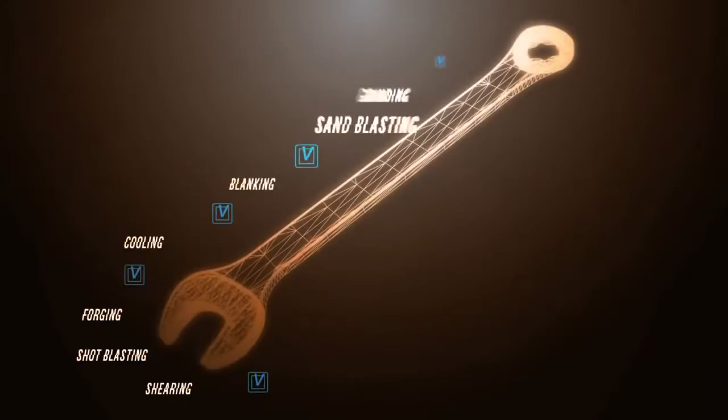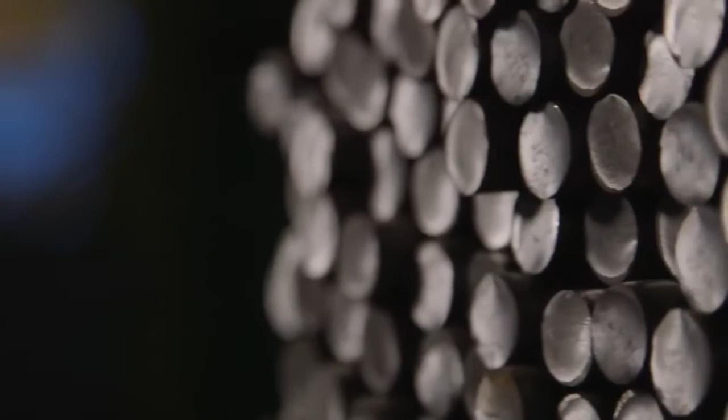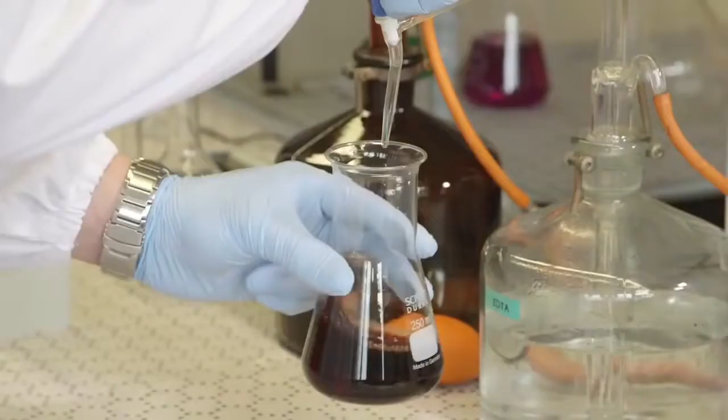It all begins in the forging department of the Beta plant in Sulmona, Abruzzo. After over 70 years of research and experience, the steel selected for the wrenches has one-of-a-kind characteristics. When the raw material arrives, it undergoes dimensional, chemical, and metallographic analyses.

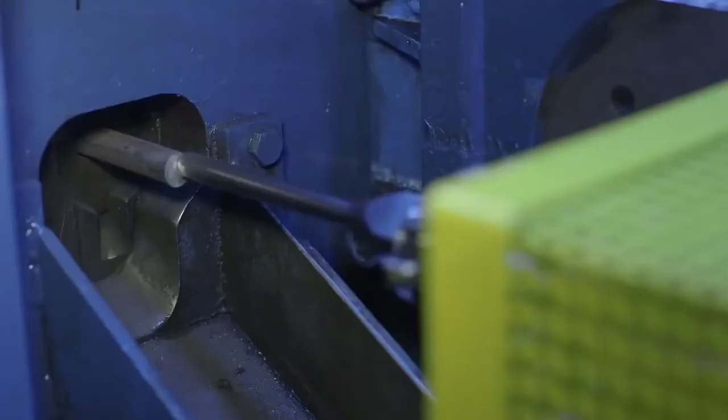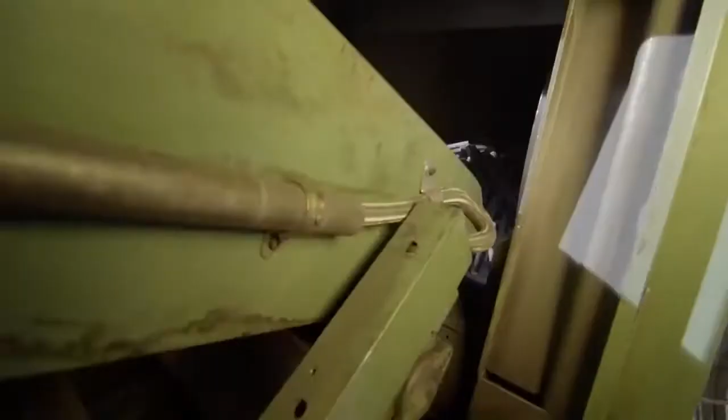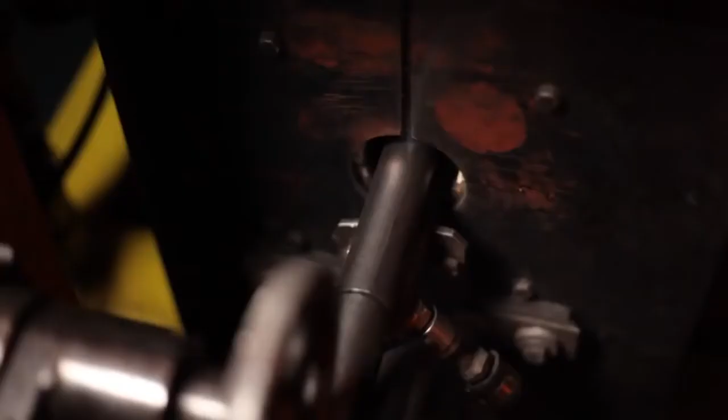The steel bars are cut into sections. The pieces are cleaned in a sandblaster to remove all steel impurities, which could enter the metal during the following stages. The forging department of Sulmona provides heating, hot rolling and hammer molding.

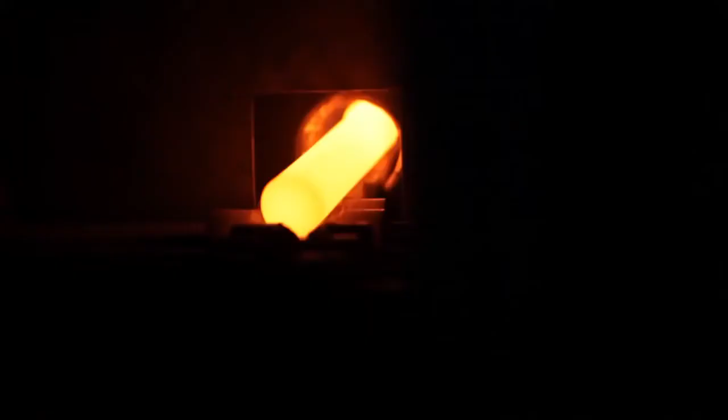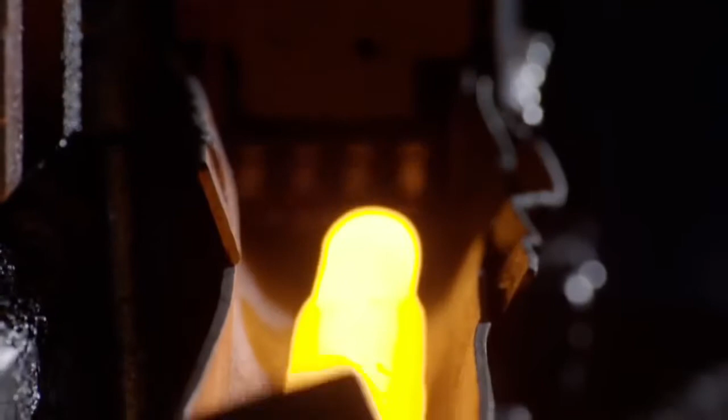Loaded into an automatic elevator, the pieces of steel enter one by one into an induction furnace, which heats them to 1250 degrees centigrade. The originally tough and resistant pieces become ductile and malleable, and therefore they can now take the desired shape. The hot rolling mill will give each piece an elongated shape, with areas having different diameters, in order to obtain the exact quantity of metal needed to form the wrench. A nitrogen atmosphere protects the purity of the steel from the surrounding oxygen, which would cause burns and slags.

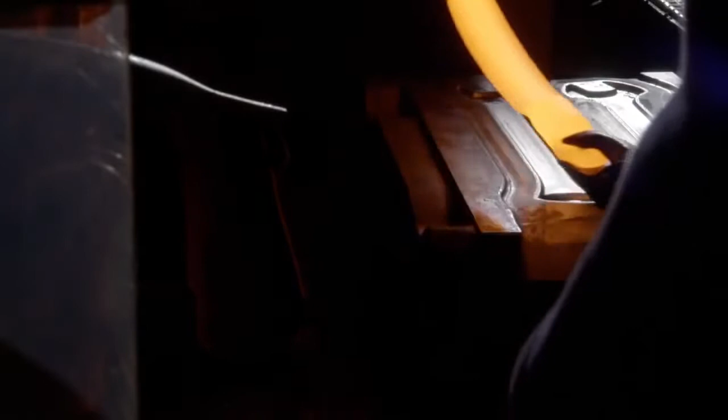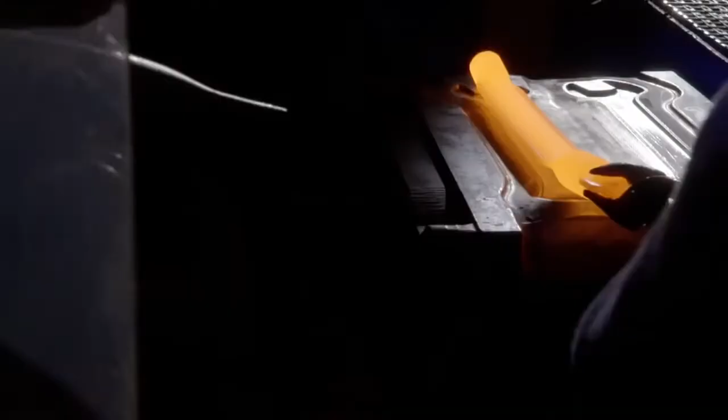The hot rolling mill directs the pre-shaped pieces into an impact machine, the hammer. The power of the hammer heavily compresses the hot material between two molds in which the shape to be obtained is then formed. The molds are always kept at a constant temperature in order to avoid thermal shock breaking and to guarantee their accuracy. High levels of concentration, sensibility and dexterity, which are synonymous with years of experience, are a must to correctly align and position the hot-rolled pieces with the molds and manage the hammer.

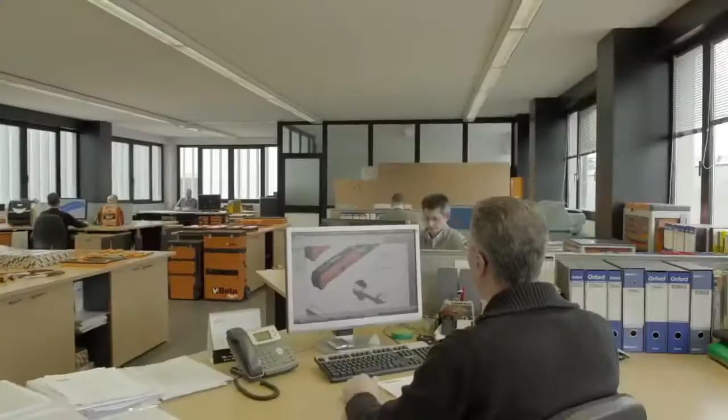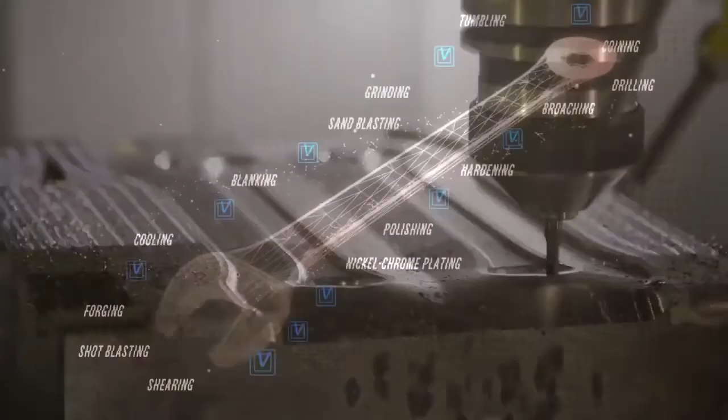When a new product is introduced, Beta's engineers at Savico translate ideas into designs, realize the three-dimensional model of a tool, and generate commands that allow the machines to build the necessary equipment. A high-speed milling machine shapes the molds and regenerates the worn ones. The frequent dimensional control of the forged pieces allows in the molding phase to determine an immediate replacement of the worn-out molds in order to ensure maximum accuracy.

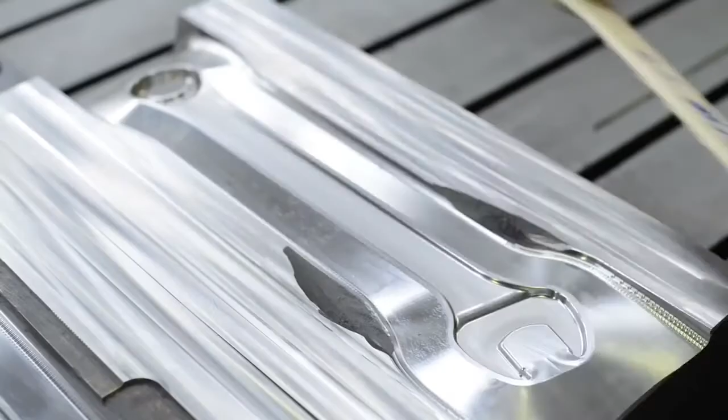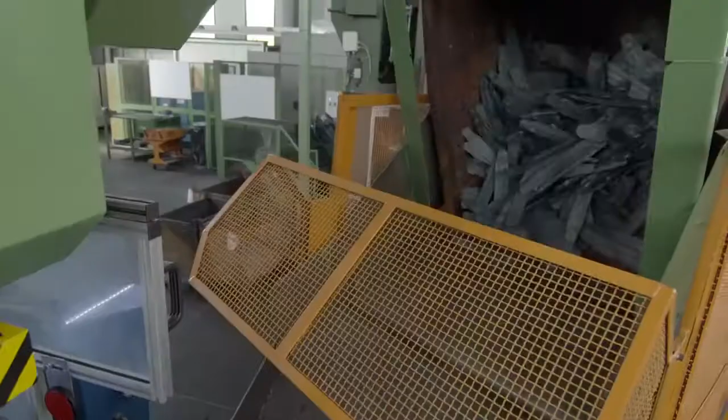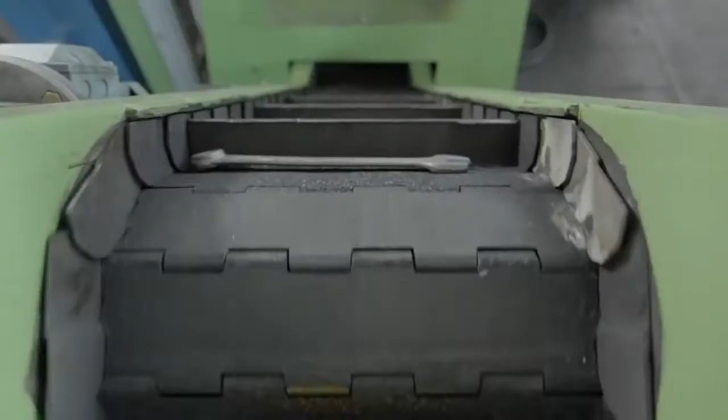After a slow cooling period, the next operation takes place. The correct dimensions of the forged pieces are carefully verified. The burrs and excess material generated by the hammer in the forging phase are eliminated. The shape of the finished Beta wrench, known as item 42, is now definitive. Another dimensional test then follows. After an additional surface cleaning, the rough wrenches are sent to the Savico plant to complete the following phases.

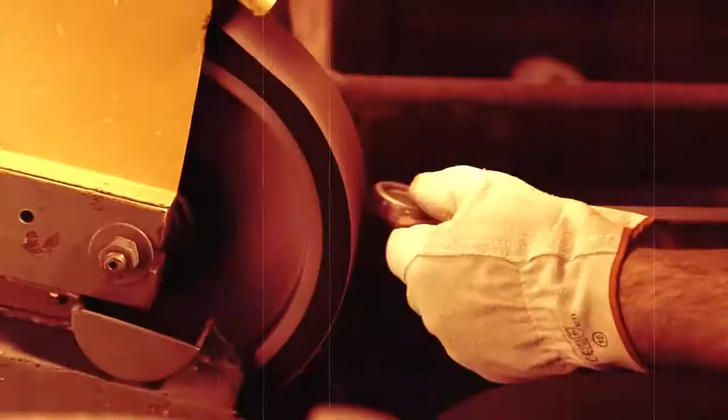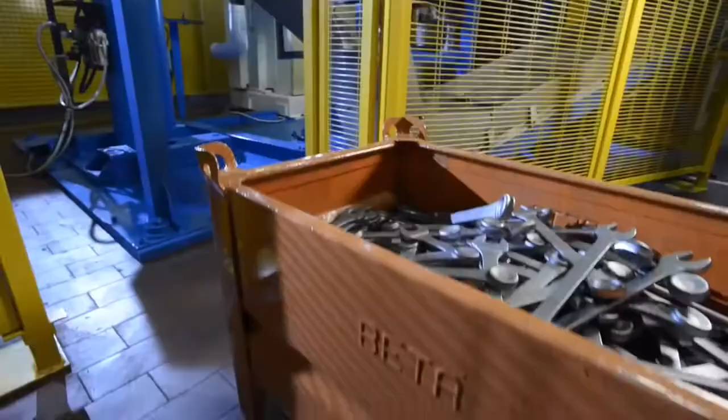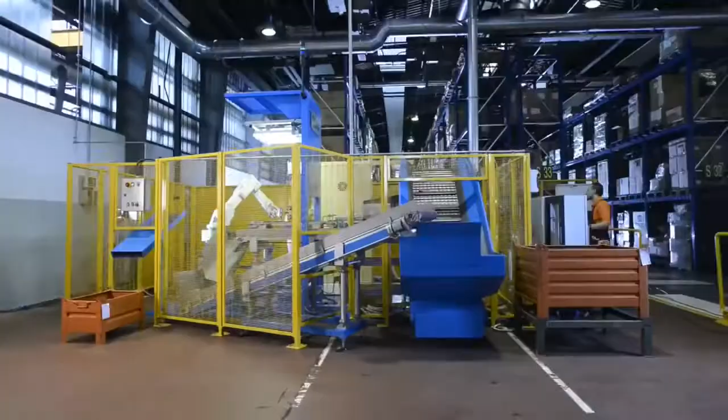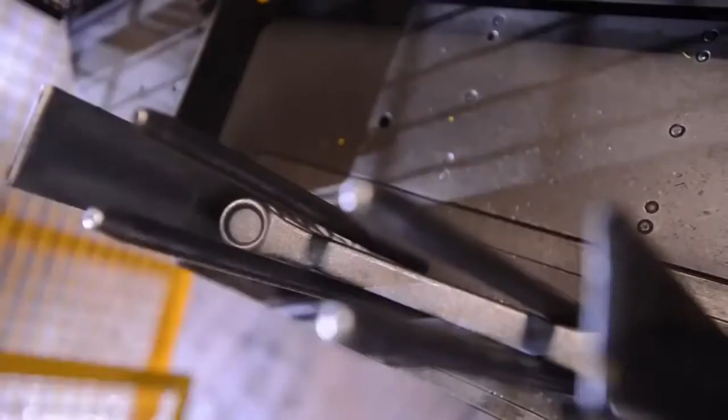Here, the wrenches are ground. Once this was done manually. For years, robots, through abrasive belts, have performed the correction of the external profile to eliminate the roughness generated by the blanking, thus smoothing the surface. The technical and tooling departments constantly study and create ever more innovative systems, as well as ensuring the maximum efficiency of all the machines in all the Beta plants. Thus, this has changed from manual loading to a fully automated process. However, human expertise will control that the tools are in full compliance with standards.

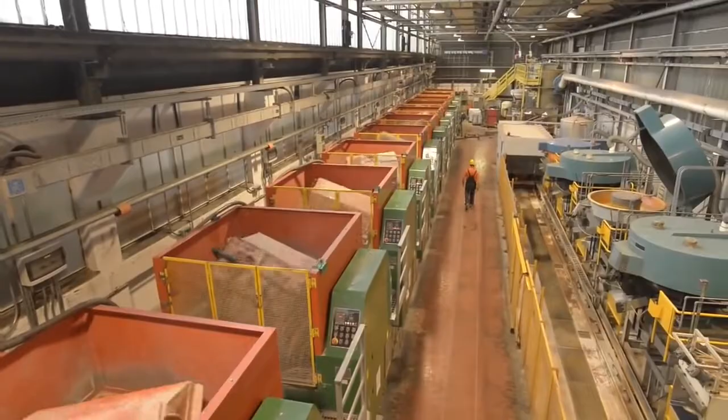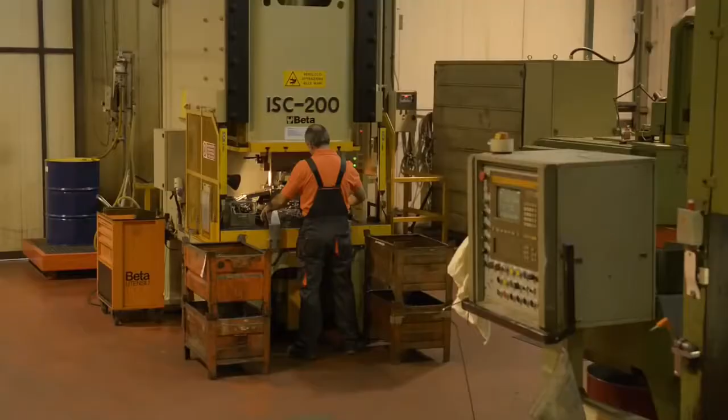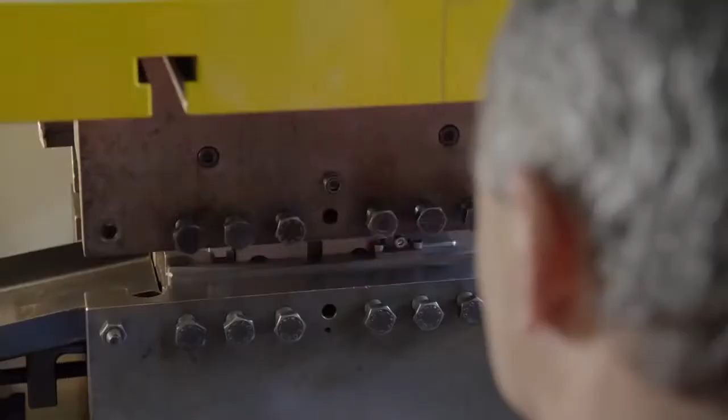Tumbling makes the surfaces that come into contact with the hand pleasant and ergonomic. Porphyry stone, water and abrasives slowly rotating smooth all surfaces. In fact, after this treatment in tumbling barrels, the piece is called tumbled. A hydraulic press with special minted imprints embosses the trademark and size. A multi-spindle drill creates accurate bores on the ring end.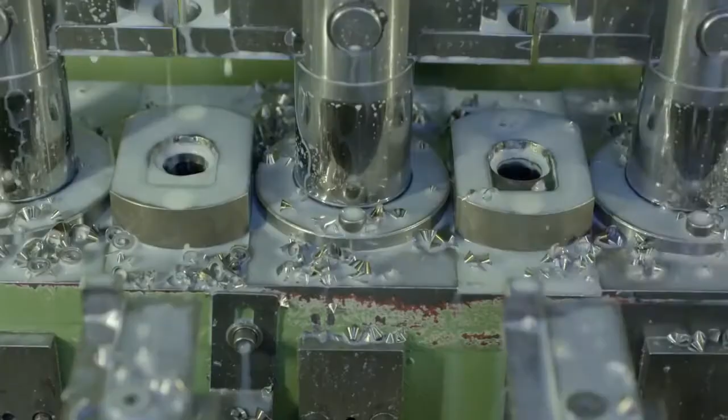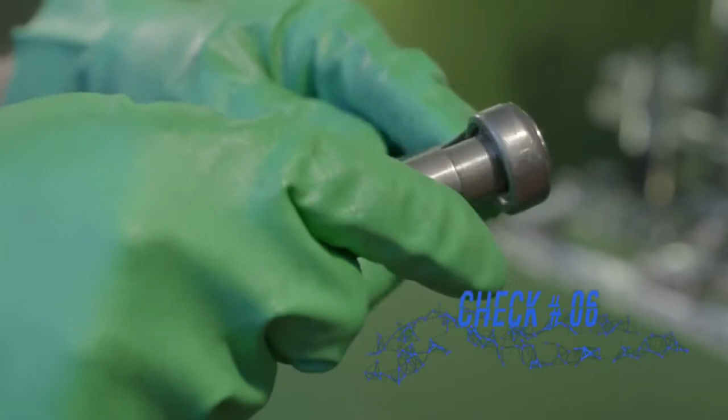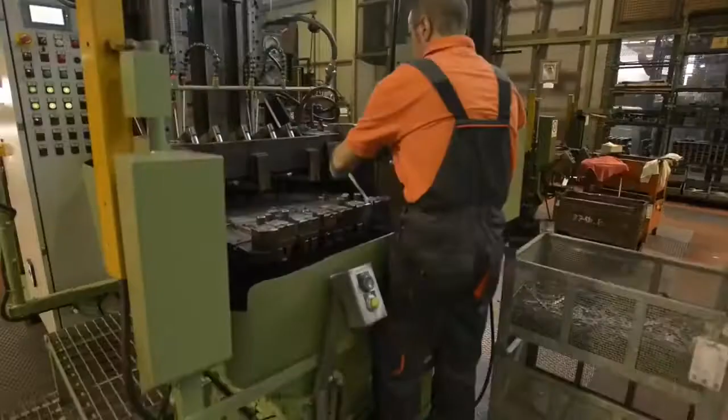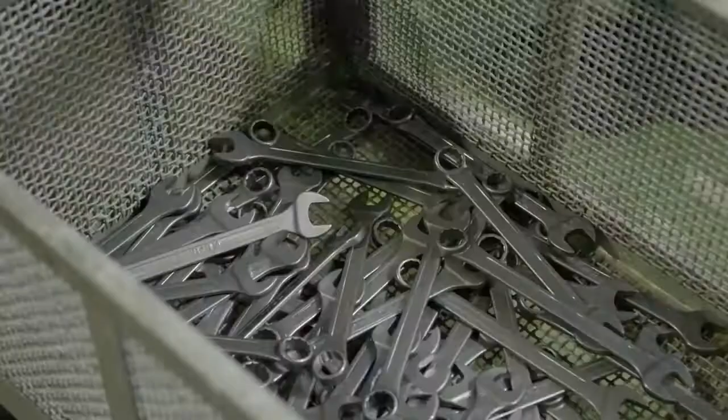The mechanical department controls that the operating ends are in full compliance with the tolerances for correct future matching of the tool to the nut. A shaped tool called broach is inserted into the bore and pulled down, generating the bi-hex profile of the tool. The process of the open end is similar, using an external broach. Special gauges are used to control the product and the dimensional tolerances related to it.

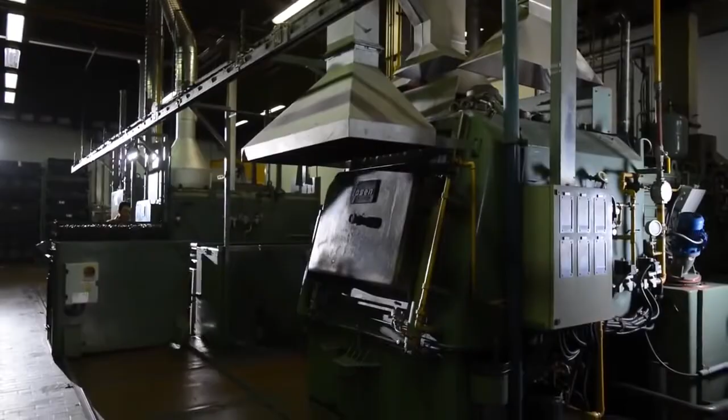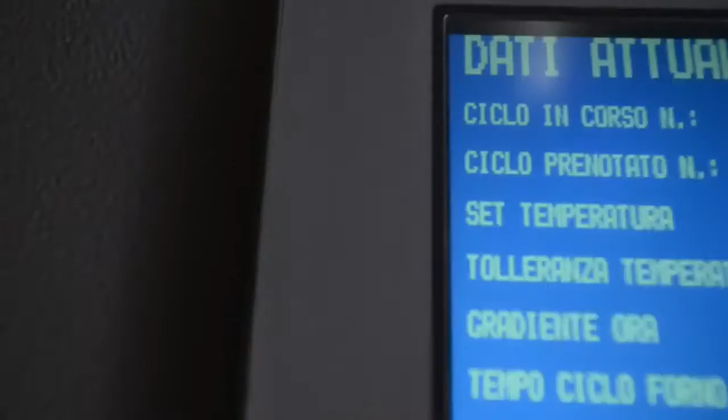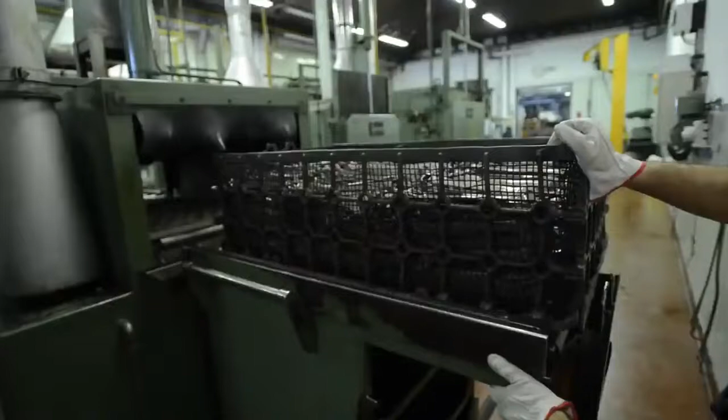Once again, fire is the key player of the thermal treatment. In the previous phases, fire has made steel malleable and workable. Now it's going to confer hardness, strength and toughness. The wrenches, well displayed in metal baskets, enter the hardening furnace until reaching a temperature of 850 degrees centigrade. The dissociated methane at a high temperature generates a gas that protects the pieces from oxidation. The dissociated methane and the hardening phase give the metal strength and durability. The wrenches are then quickly dipped in an oil bath. They cool rapidly and become very hard and resistant, but not sufficiently elastic.

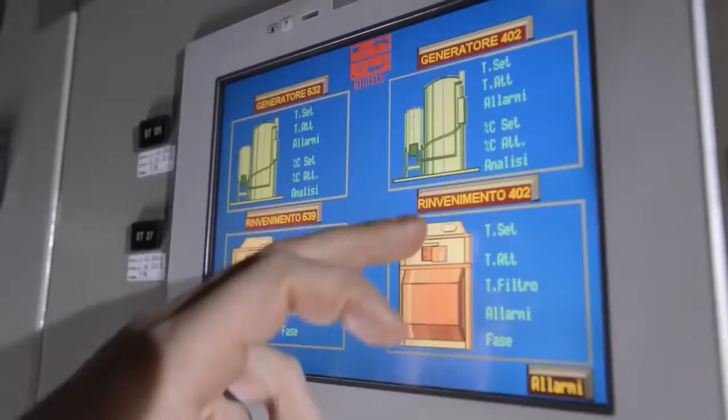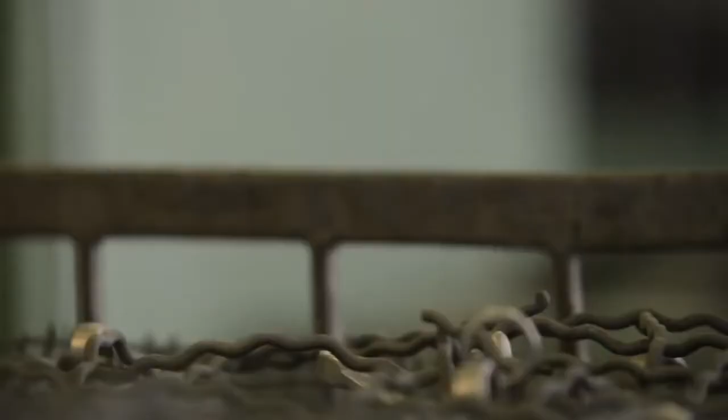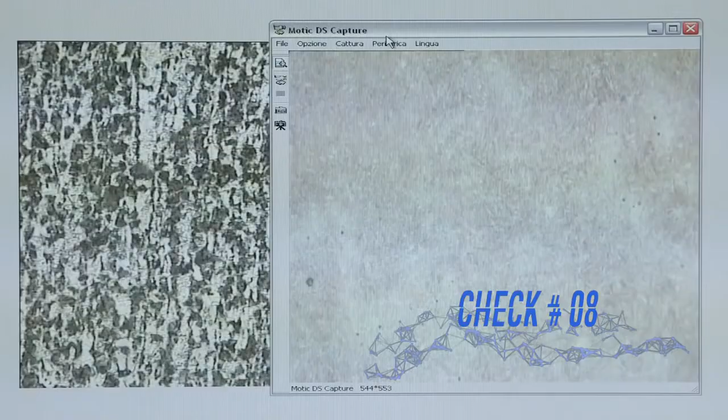After a thorough washing phase, the wrenches are once again heated to 360 degrees in the tempering furnace, and after a slow cooling to 180 degrees centigrade, they become tough, thus resistant to shocks and stresses. Now the structural transformation of the steel is over. Raw material and hardening are the main quality ingredients of a wrench. The control of the final structure of the steel is crucial and is done before the final phases. This will improve the aesthetics and resistance to impact and corrosion.

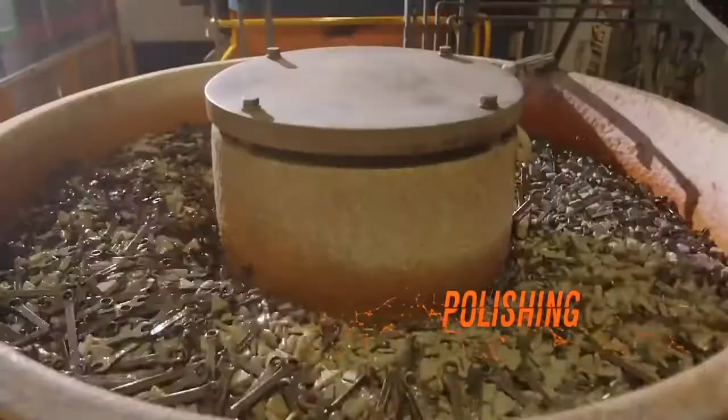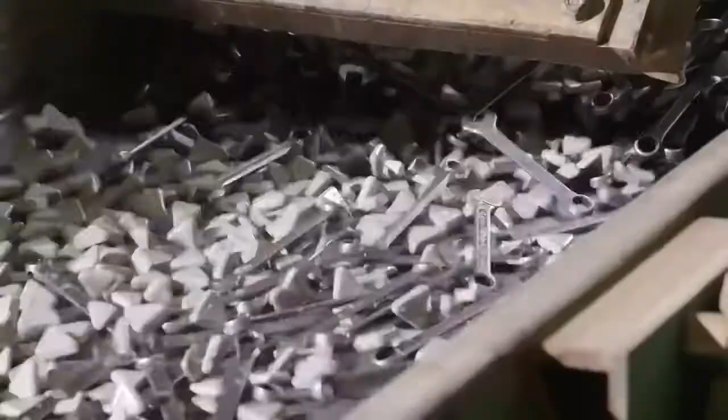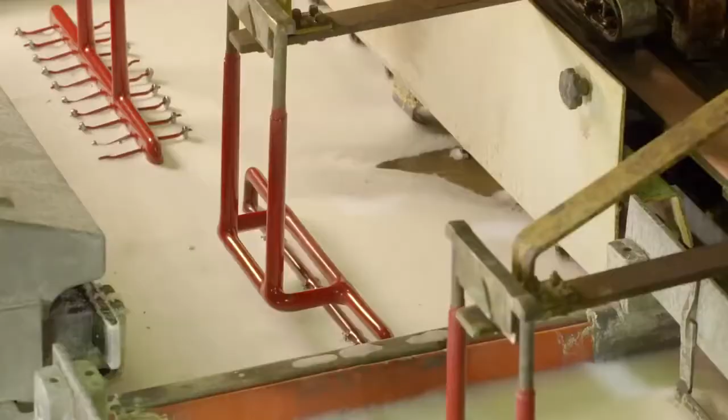In large vibrators, the combined action of chemical additives and small ceramic stones perfectly polish all surfaces of the tools, which are magnetically separated from the stones. Now the wrenches are ready for the finishing phase. During galvanic treatment with an electrolytic process, a thin layer of material is deposited to add qualities to the wrench that are lacking in the steel. In particular, nickel and chrome improve aesthetics and render the tool resistant to corrosion, atmospheric agents, and aggressive substances with which the tool will enter into contact during its long life.

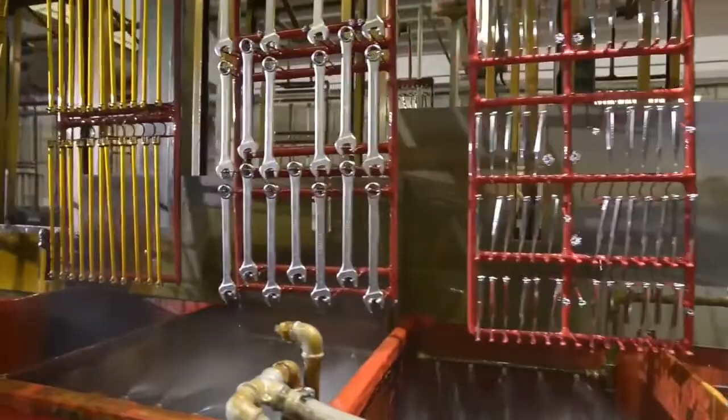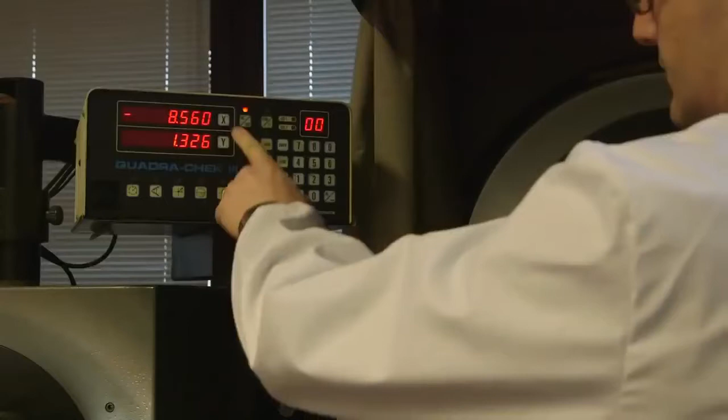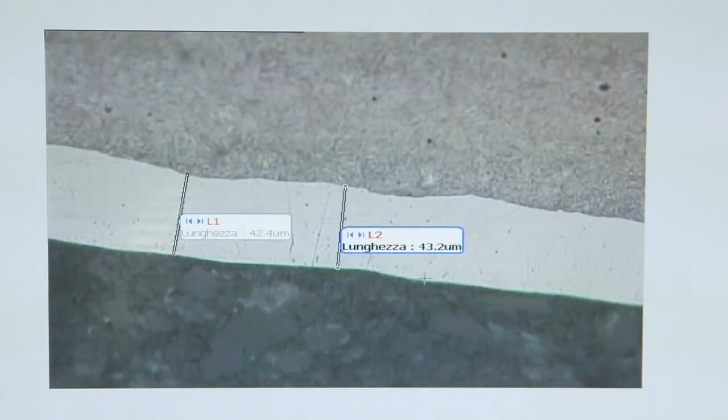A thorough visual control shows any aesthetic imperfections. Before the wrench is ready to be sold, there are still several tests to be performed. The hardness must always be greater than the ISO specifications. The micro hardness tester also checks the decarburization, i.e. that the hardening and tempering phase has not removed too much carbon. The thickness of the nickel plating must also be uniform and of the correct size.

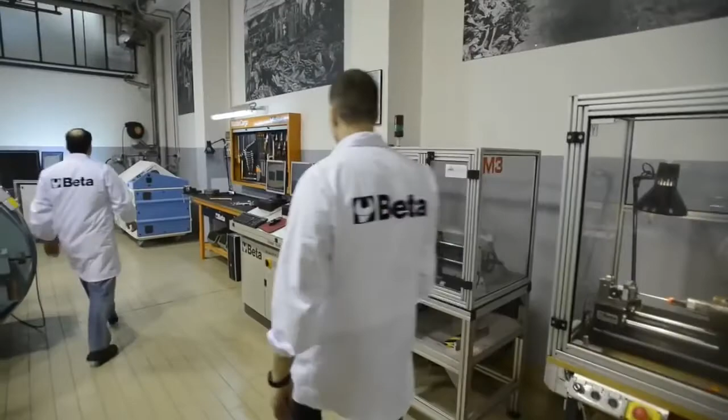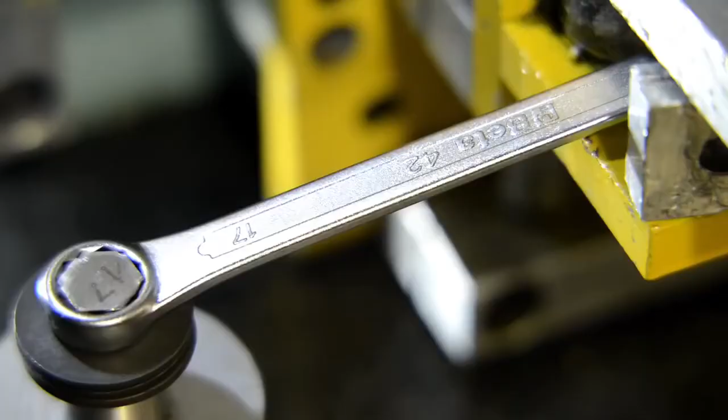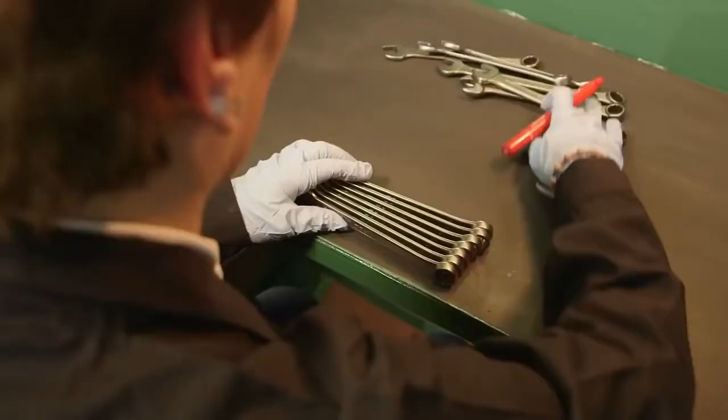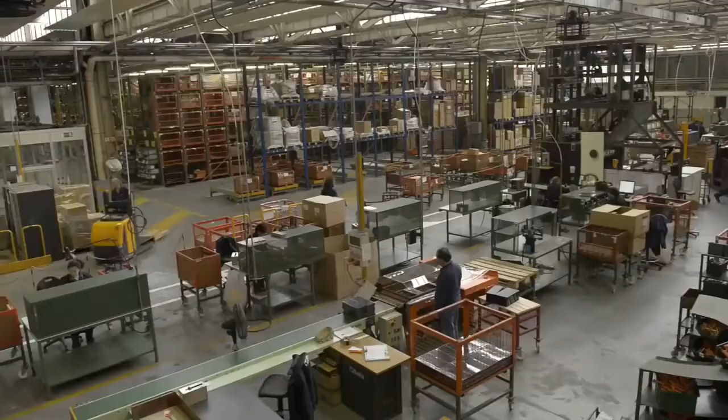The hardest conditions of use are simulated in the quality control department. The wrench undergoes torsion tests that overcome even those required by the current standards. Static torsion test and dynamic torsion tests. Corrosion resistance is tested by dipping the wrench in a saline atmosphere. A further final test verifies that each batch of wrenches complies with Beta standards, which have always been higher than those required by the international standards. Now the combination wrench can be packed and stocked in Beta's warehouse. After 10 controls and a total of 24 phases, combination wrench item 42 Beta is ready to be sold worldwide.